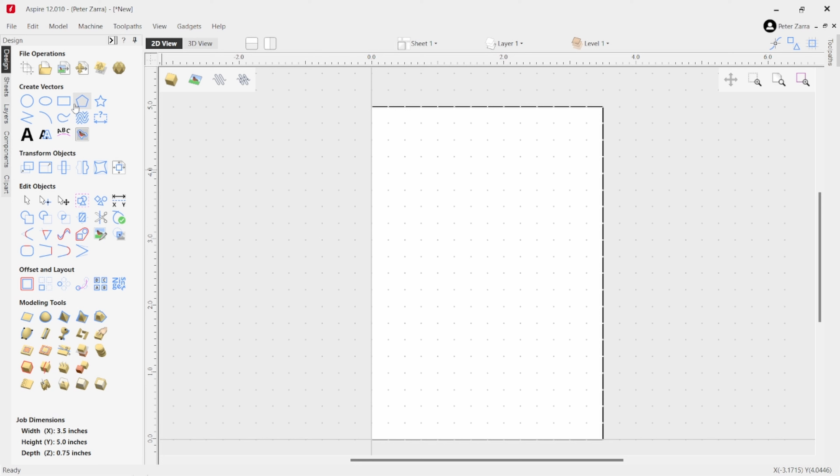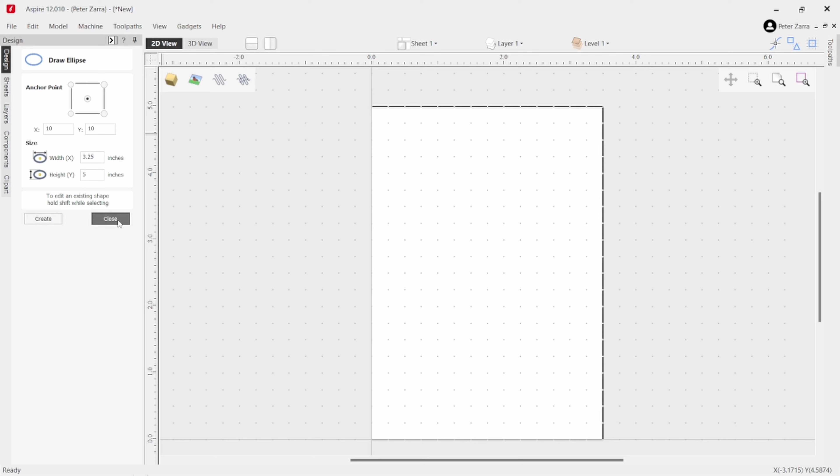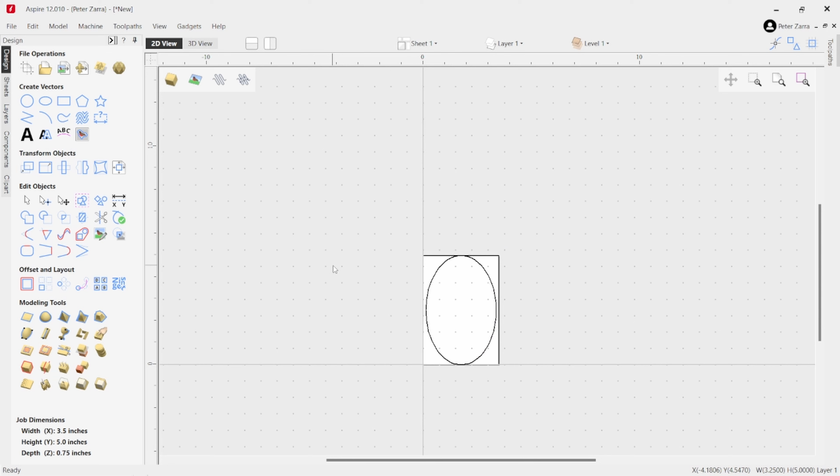Now the next step I'm going to do is I'm going to draw an ellipse. And for the ellipse, I'm going to do the same size that I have on my board, minus a little bit just to keep it to the inside. So instead of 3.5 inches wide, I went 3.25, and for the height, I did go 5 inches. So I'm going to go ahead and create that, and then close it. And if I zoom back out, I'll find it here. And I will bring it in and place it there. And I'm just going to make sure that it's aligned, and it is. Okay, so that's good.

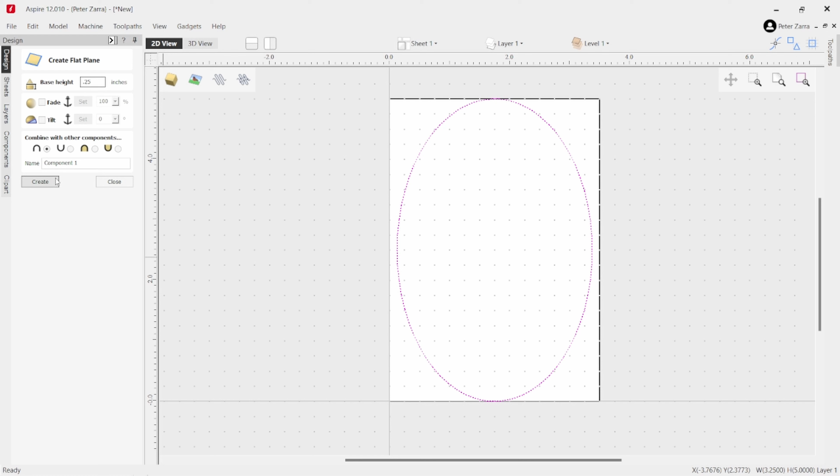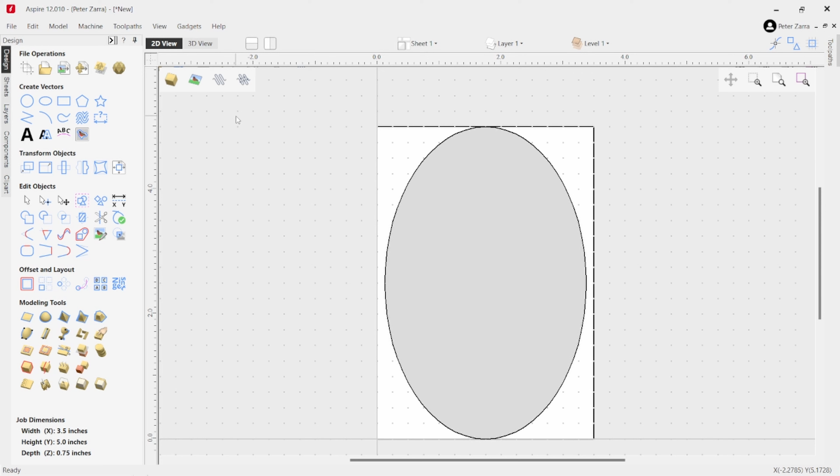So I've got my ellipse there now, and the next step, I'm going to highlight the perimeter of that ellipse, and I'm going to go over here to the modeling tools, and I'm going to create a flat plane component. Basically what I'm doing is I'm creating a background for the ornament, like a plaque, so to speak, which the Santa will sit on and sit proud of. So for this, I want it to be 1/4 of an inch thick. So I'm going to hit create on that. And there we go. Okay, so now if we go to the 3D view, you can see I've got a 1/4 of an inch thick oval background. Okay.

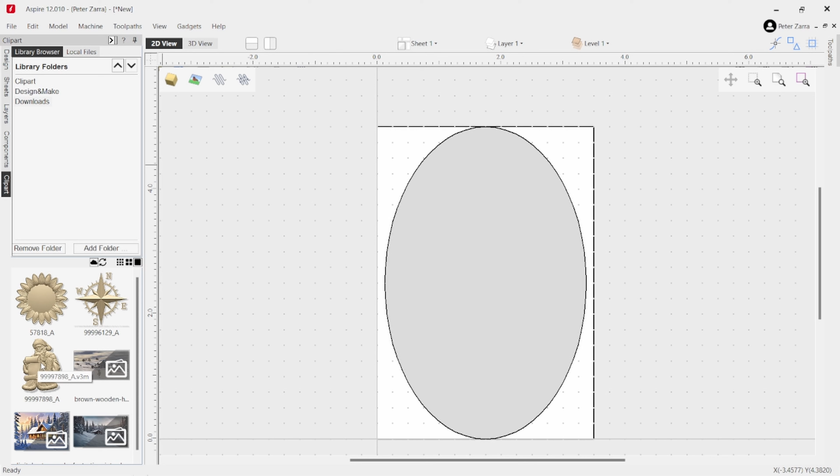So now from there, I will go to my clip art. Now I purchased from Design and Make, which is on the Vectric website. You can buy all types of files from, like here I have a compass, a sunflower. I also bought the Santa and the other Christmas tree tray that I'll show next. So from here, I'm going to take the Santa and I'm going to drag him onto the surface. And he's way too big, so we're going to shrink him down and see when it gets close. Still, it needs a little bit more. And let's see how he's starting to look. Almost.

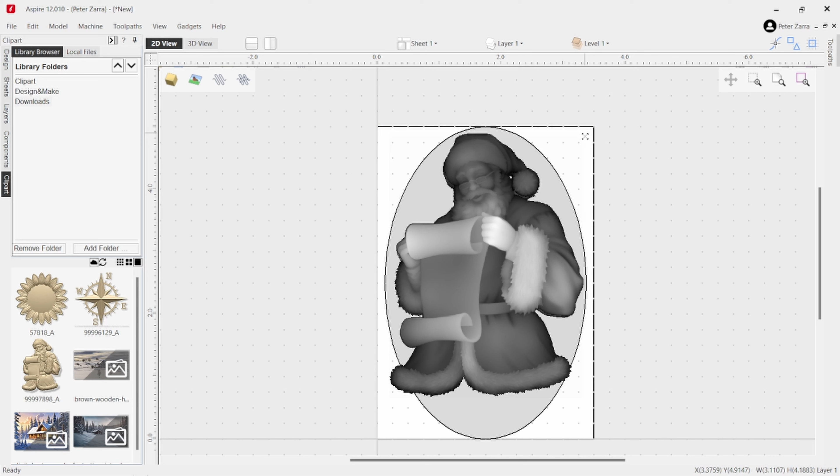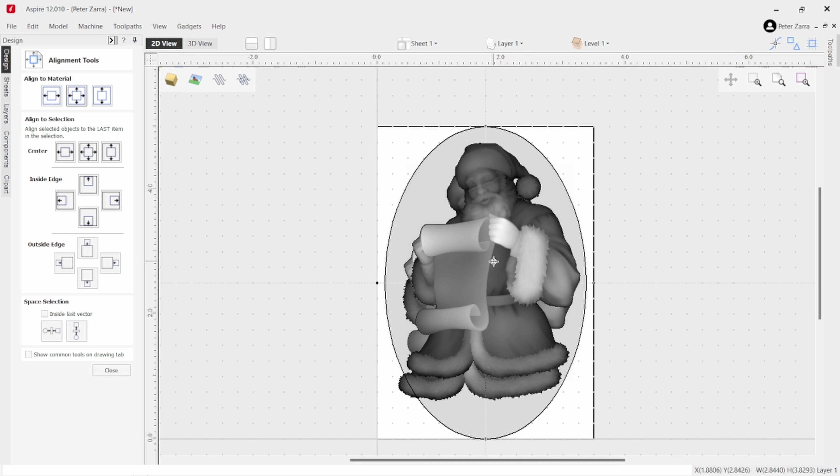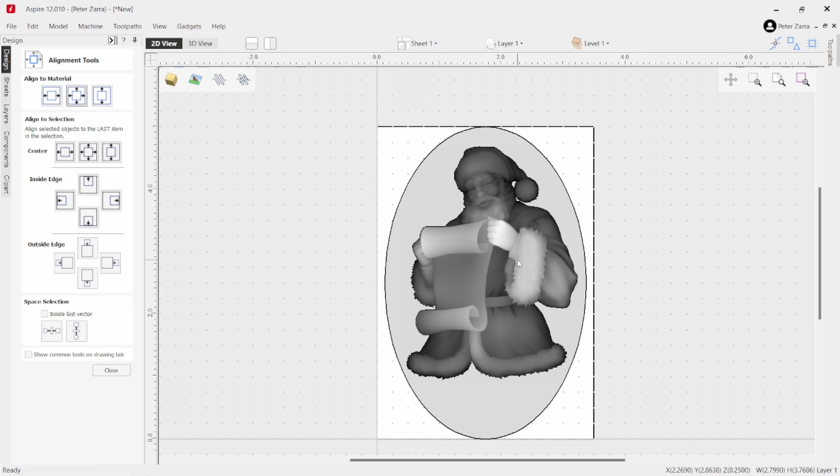I'm going to see if I center him. Nope, it's not going to work yet. That's not bad. Yeah, I don't mind that. Maybe I'll go just a smidge smaller. And yeah, I think I like that. Okay, so now that you have Santa placed on the background, I just want to

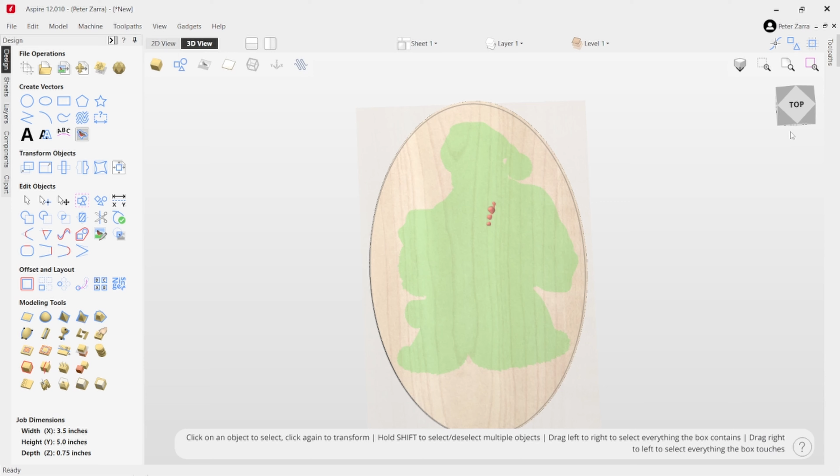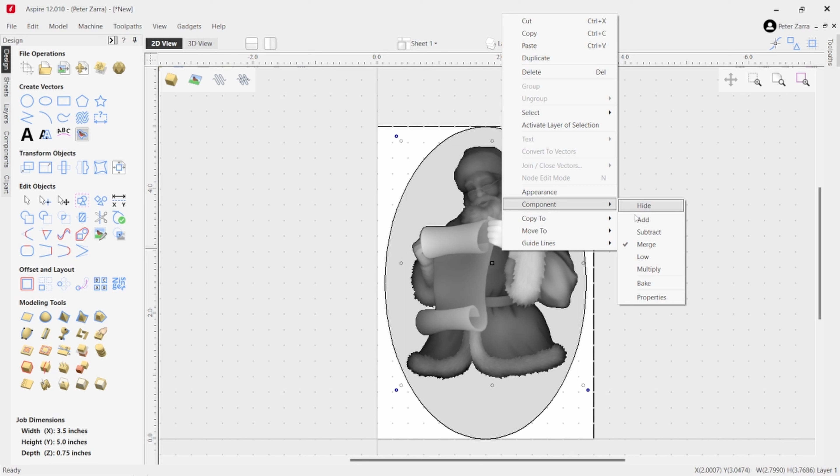double check. Okay, so now that I've added Santa onto the background, if you'll see here in the 3D view, Santa's not sticking up above the surface. So he's basically merged with the background, and that's not going to work. So what we do is go back in, you click on him, highlight him, then you right click on the mouse, and if you go to under component here, you see it's under merge, and that's not good. We want to add him to the surface. So you click on that, and then it comes up.

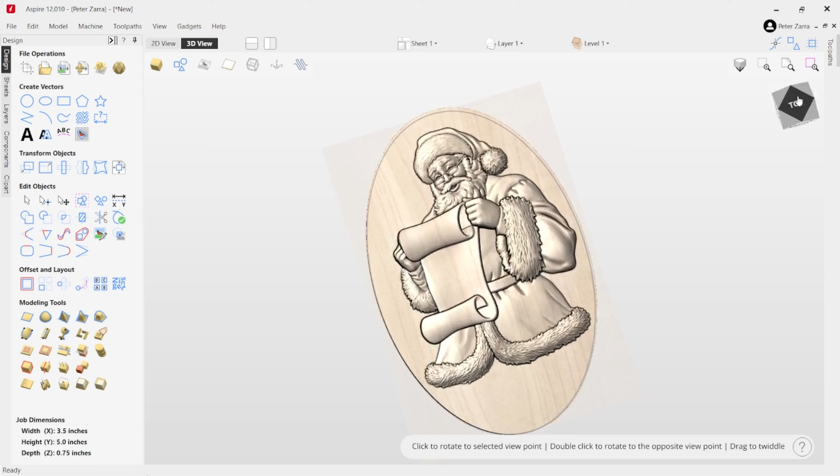Go to the 3D view, okay? And now you can see that Santa is sitting on top of the background and proud of it, and that's what we want. That's the look we want, okay? So for the design aspect, that's it for the ornament. Now we're gonna head over to the toolpaths.

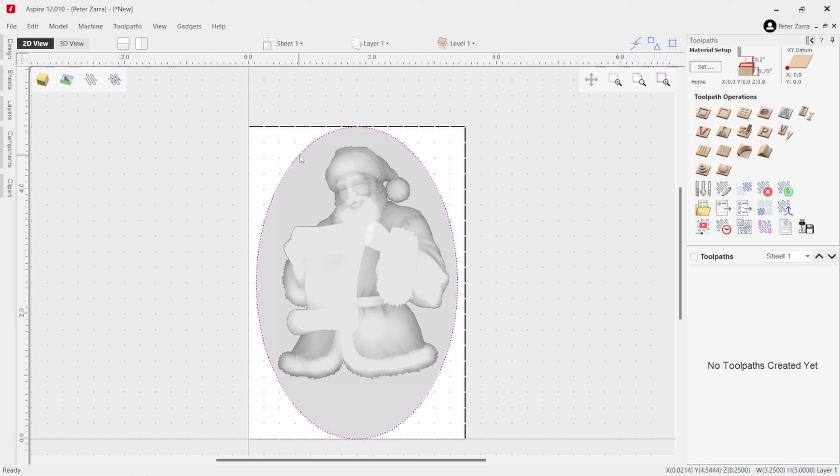Okay, so the first step in the toolpath here is we are going to select this outline of the oval or the ellipse. Once you have that selected, I'm just going to double check the material setup first. It's 3/4 of an inch, which is what my material thickness is. The XY datum will be off of the front left corner. We're going to be going off the material surface. The model positioning is correct.

And everything else looks good. Okay, so now that the material setup is correct, we're going to go to the 3D roughing toolpath. In the 3D roughing toolpath, I'm going to be using a 1/4 inch 2-flute upcut end mill to do the roughing on this particular ornament. And we're going to be using the selected vector, which we've already selected here, the ellipse, oval.

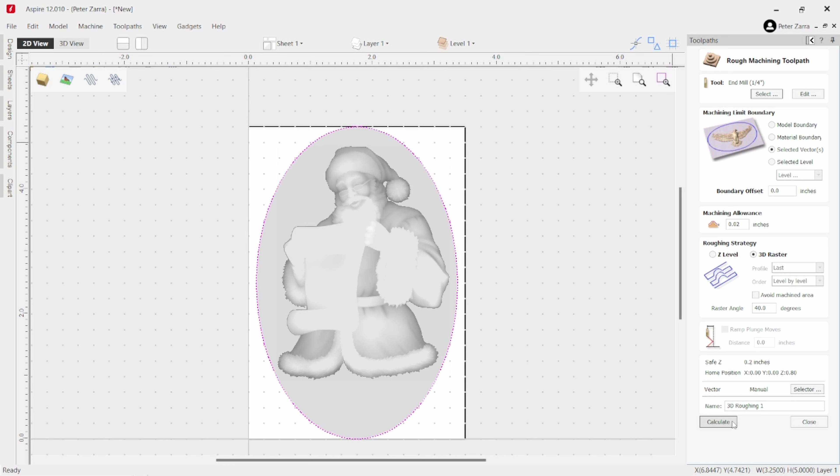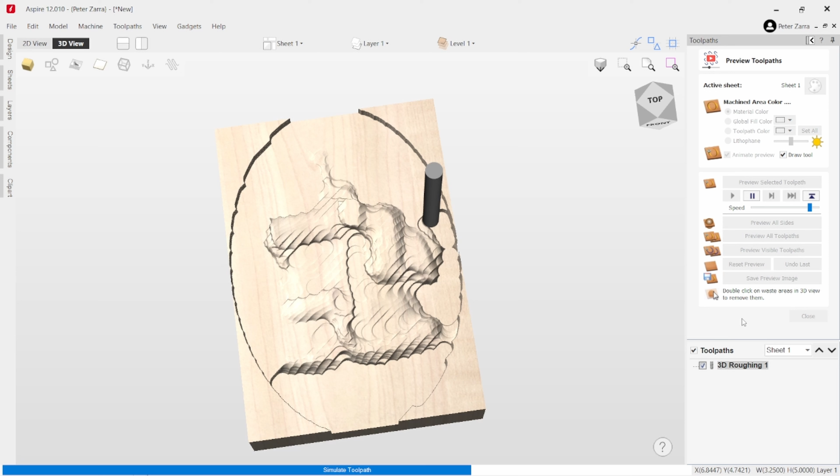There's no boundary offset. We'll have a machining allowance of 0.02. We can clean that up next in the 3D finishing toolpath. We're going to be using the 3D raster on a 40-degree angle. And that's it for this. So we'll hit calculate. Let me reset the preview there. That was from the old one. And I will show you, we'll play it. Okay, so that's what our 3D roughing toolpath is going to look like, and that is fine.

Now that we've got that done, we leave it selected, the ellipse. We go over to 3D finishing toolpath. In the 3D finishing toolpath, we're going to be using a ball nose 1/8 inch end mill. We are going to be using same thing, selected vector. We have a boundary offset of minus 0.02 on this one. And the reason I have the boundary offset at minus 0.02 is so that I leave a little bit going around the edge, which will get cleaned up with the profile pass that we're going to use to cut it out.

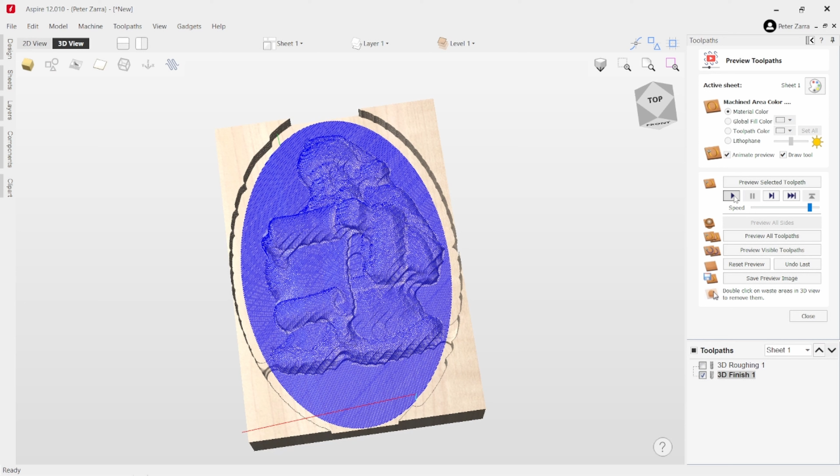And again, same thing, we're going to raster it on a 40-degree angle. And that should be good. So we'll hit calculate. Okay, so now I will just play this one out. Okay, and you can see here, this is the minus 0.02. That's what this gap is that is going around the perimeter of the ornament. And that's fine. That will get cleaned up right now in the profile toolpath. So I'm going to close this out.

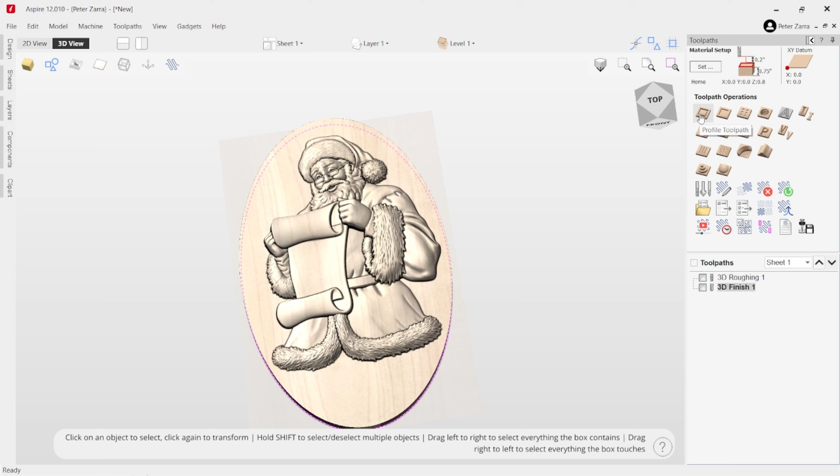So now that we still have the vector selected, we can go up here, profile toolpath, and our start depth will be 0. We're going to a cut depth of 0.753. Remember, my material is 0.75 thick, 3/4 of an inch. So I want to go a little bit past that. I have sacrificial material underneath, so I'm not worried about going through. So that is good. I'll be using a 1/4 inch end mill, a 2-flute end mill, and that'll be an upcut to cut this profile. It's going to do it in 6 passes.

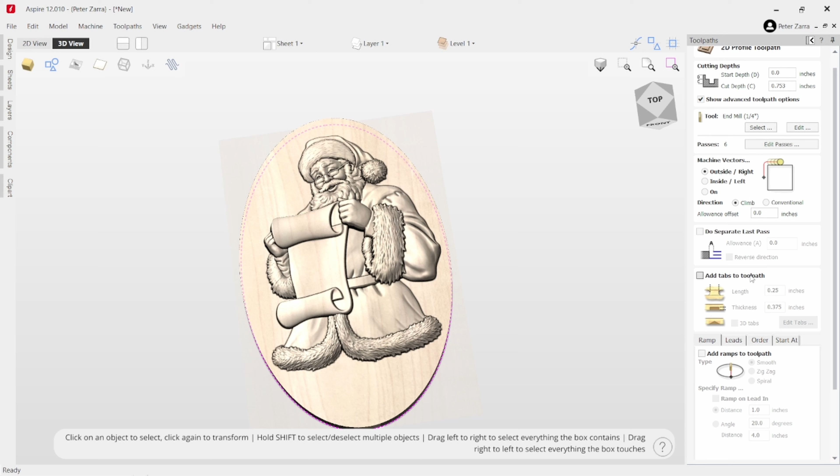And for machining the vector, we are going to machine it from the outside of the vector. So not on the inside, not on it. We're going to be on the outside of the vector. And that will give us just enough room to clean this up. No allowance offset. No separate last pass. No tabs. So that should be good. Calculate it. It's warning me I'm going to go through the material. That's okay. So now I will just hit play.

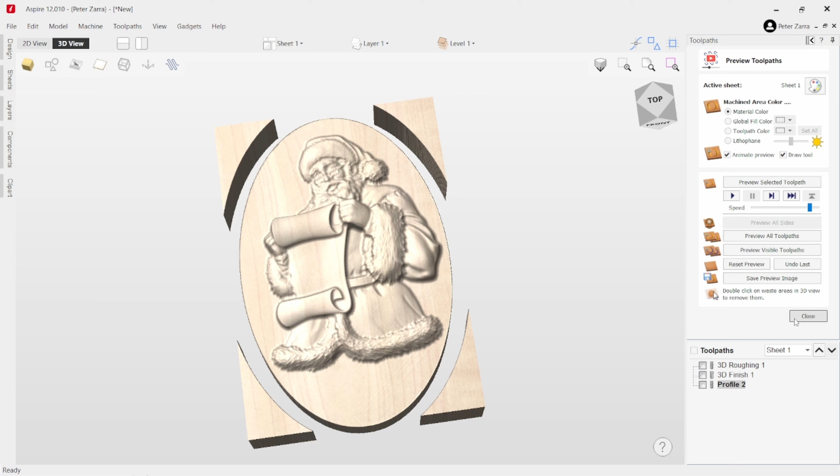And there we go. So as you can see, it cut it right on the line where I had left that 0.02, and it gives me just enough room around the edge there. And that's it. It looks pretty good. Okay, so I'll close that. Now I'm going to click on Toolpaths, and we will click Save Toolpath. And this is where you can save it to your files so that you have access to it when you get to the machine. All right, so that will do it for this ornament.

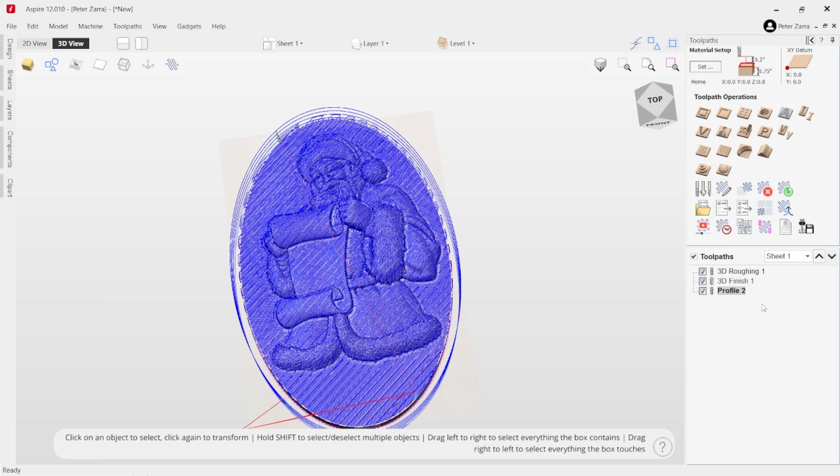Next up, I'm going to show you how I designed the Christmas tree tray. Okay, so for this next one, the Christmas tree candy tray, we're going to go back up, create a new file. And again, this job type, it's going to be single-sided. The job size, the board that I'm going to be using for this tray is 12 inches width by 12 inches in height at a thickness of 1.5 inches.

The 0 position will again be the material surface, and we're going to be using again the front left corner for our datum position. Very high resolution, and it doesn't really matter the material settings. I'm going to make mine out of walnut, so that's what I'll be using here. I'll click OK, and again here we have our board, 12 inches by 12 inches at 1.5 inches thick.

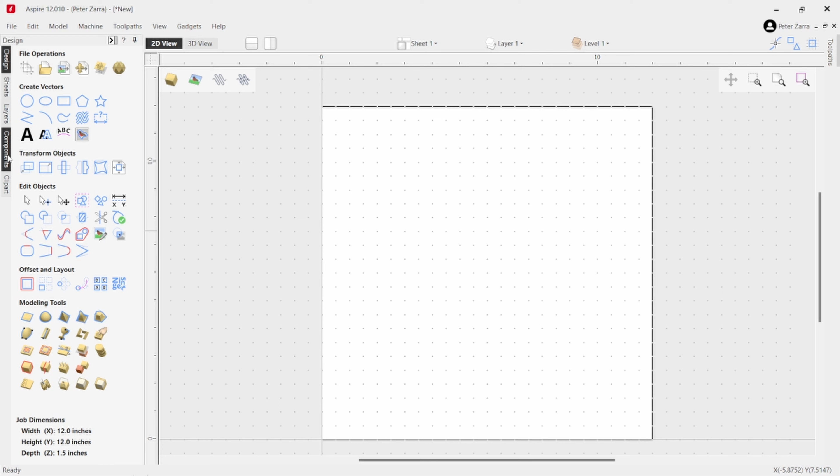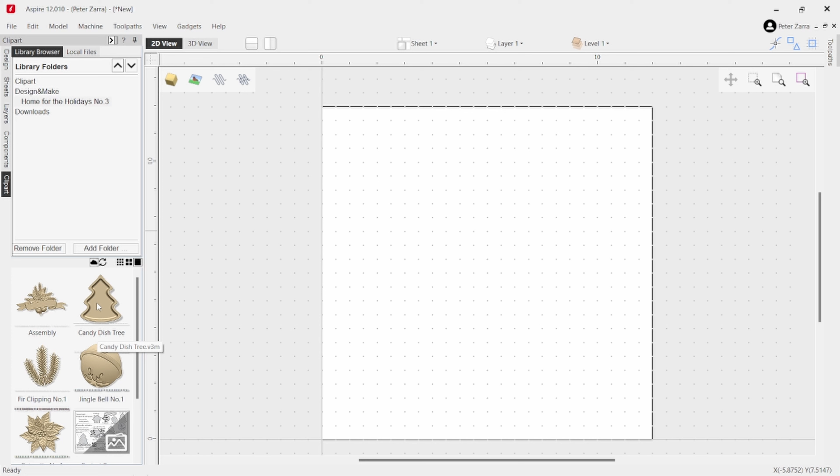And so what I used for this design is I went into the clip art here at Vectric, and I went into their Design and Make store, and I bought the Home for the Holidays collection number 3. That collection comes with 5 pieces, 1, 2, 3, 4, and 5. And part of it is the candy dish tray, the tree tray. And so I'm just going to select this individual component, and I'm going to drag it over to my board.

And now I'm going to upscale it there a bit so that it fits our board. And I go a little more. That's pretty good. I like that.

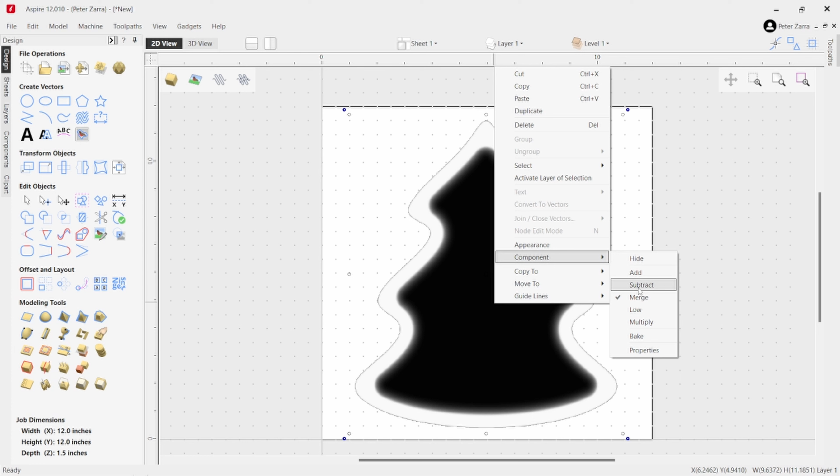Okay, so the next thing we're going to do is I'm going to select the tree itself. And the problem with the tree is that from the store, it comes, and what I'm going to do is now that I've selected it, I'm going to right click on the mouse, and I'm going to go to component, and then in component I'm going to go all the way down to properties and click on the properties of the component.

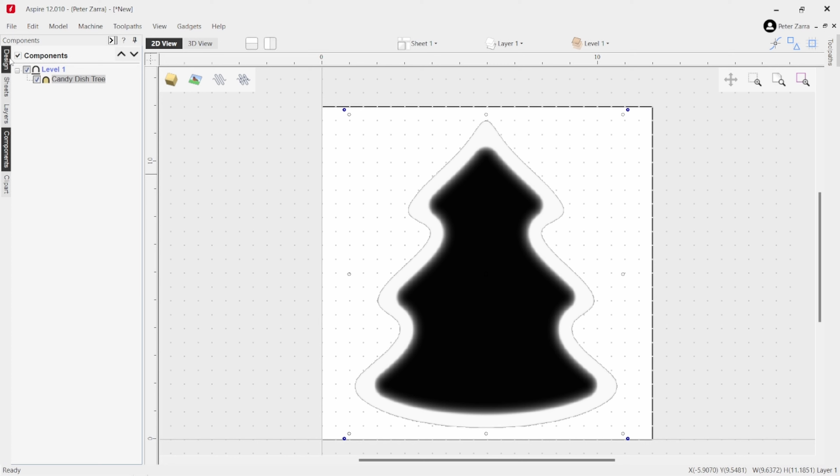And here you're going to see that the component, this tree, has a shape height of 0.6363. And that's not going to work here because my board is 1.5 inches thick. So I'm going to change this shape height to 1.5 inches, and I'm going to close it. Okay, and it should have changed it. So that now if we go into the 3D view, you can see that we have a 1.5 inches thick Christmas tree tray.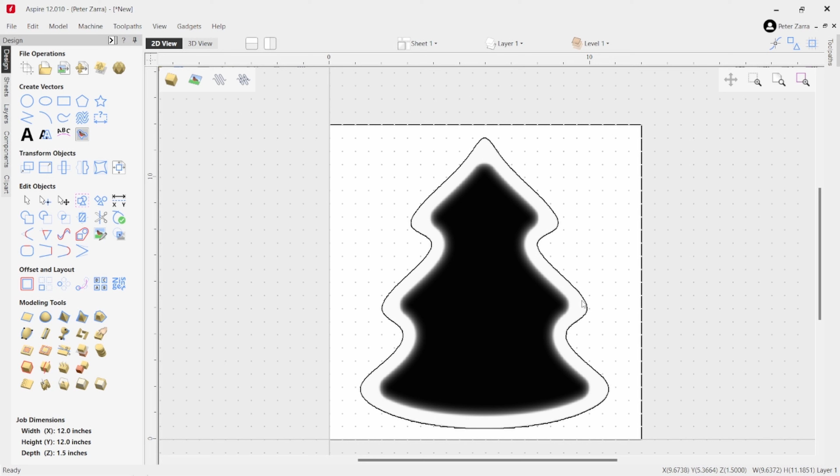Okay, now I'm going to go back to the 2D. I'm going to click on it again to select it. Once I've selected it, I need to make a vector boundary around the entire piece. So we're going to select it, and then I'm going to go over to here and click on create vector boundaries under the modeling tools. See, it automatically created a vector boundary all the way around the tree. We're going to use that for the toolpaths.

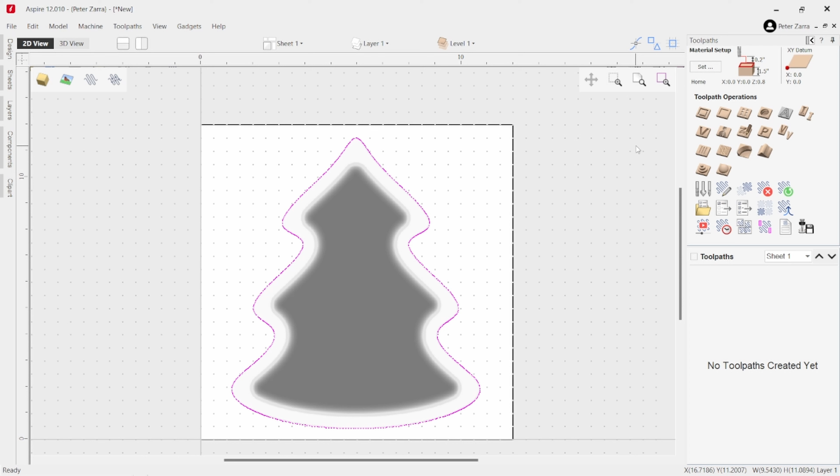So that's it for the design. There's no more to be done here. So we're going to head over to the toolpaths, and in the toolpaths I'm going to select this boundary. And the first step in the process is to set our material first, sorry. And the thickness of our material is 1.5 inches. Again, our XY datum is going to be the front left corner. Z0 is always the material surface. Model position's fine. Everything else is good here. We don't have to change anything, so I'm going to click OK.

Then I'll go back to the pocket toolpath. And for the pocket toolpath, I do it in two passes, in two toolpaths. So I do a rough out one first with a large step over just to get the material out of there quickly. And then I do a cleanup pass, a second pocket toolpath at a much tighter step over so that the bottom of the tray comes out nice and clean, and you don't have a lot of lines from the step over.

So in this first one, the roughing one, our start depth will be at 0, the material surface, and 0.75 is going to be our first cut depth. I want the bottom of the tray to be 1/2 inch thick, so my total cutting for both pocket toolpaths will be 1 inch. The first one will be at 0.75, and the second one I'll show you after is going to be at 0.25. I'm going to be using my radius end mill, which is my bowl and tray bit, the 3/4 inch one. So this is good.

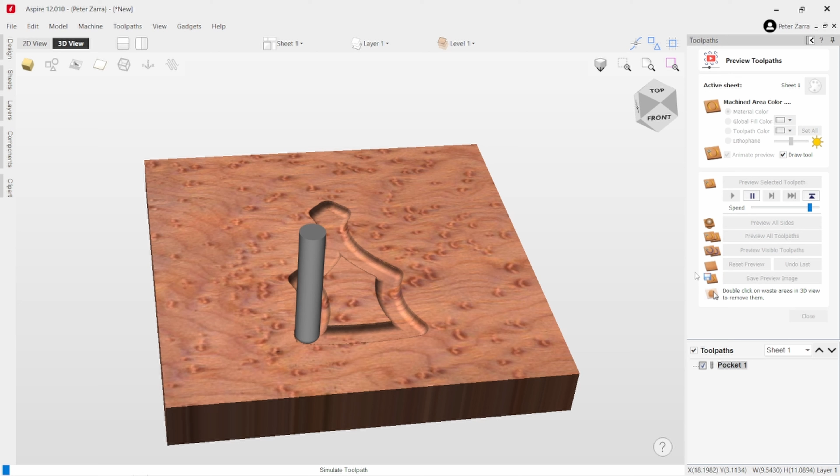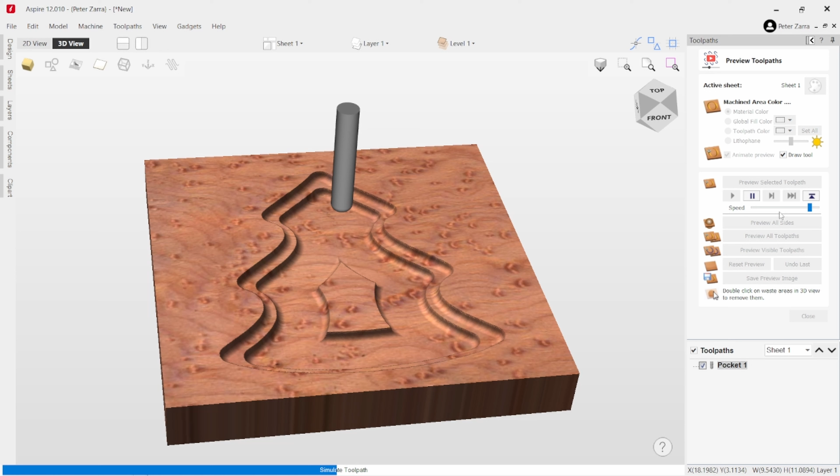I like to do it not really, really fast because I like to watch what it's doing just to make sure that there aren't any errors as it's doing it. If you go too fast, you might miss something, and then you'll find out later when you're on the machine and wonder why. Well, this helps to save a little bit of a problem later on.

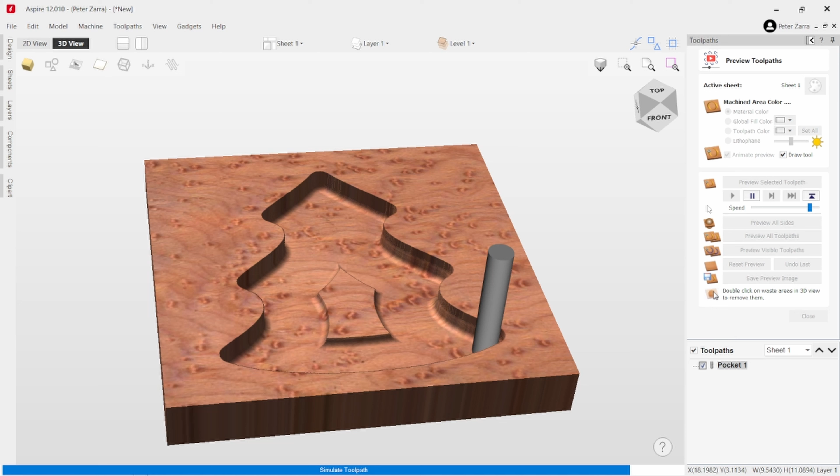Okay, so that is our rough tool path for the inside of the tray. So I'm going to close that out. And now, while we're still selected, I've still got the boundary selected. That's what we're working off of. We're going to go back to the pocket toolpath again. This will be pocket toolpath number 2.

So now our start depth is no longer at 0. Our start depth is going to be at 0.75. And our cut depth is going to be at 0.25. Okay. Again, same bit. Nothing has changed. It will now do this in one pass, offset pattern. However, let me just double check the settings here now for this one.

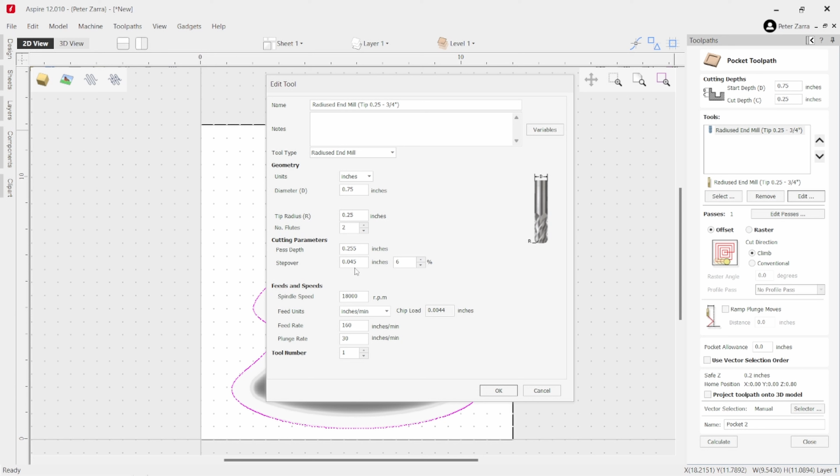Yes, it has the tighter step over, which will yield a nice clean looking bottom, and it won't have the step over lines. So this is fine. I have it at 6% at 0.045, so a little less than a 1/16 of an inch. Again, climb cut.

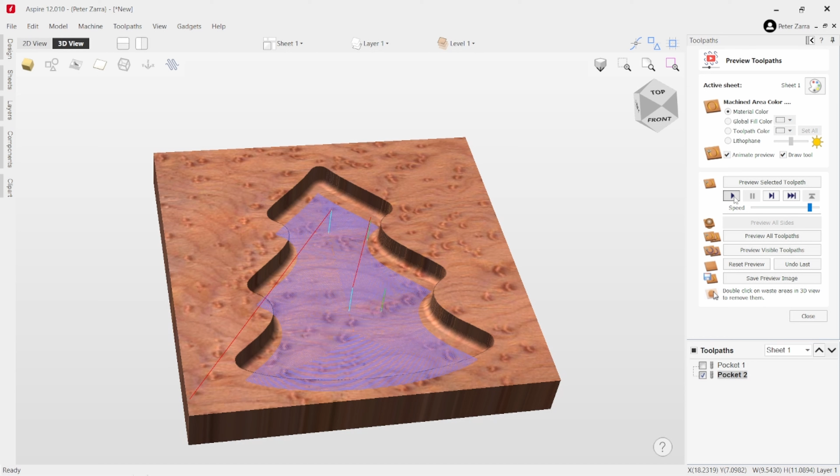And same thing, we have to include the same pocket allowance here. So 0.375. So we maintain our wall going around. And that should be it. I'm going to play this one out. And there you go. Okay, so that is good.

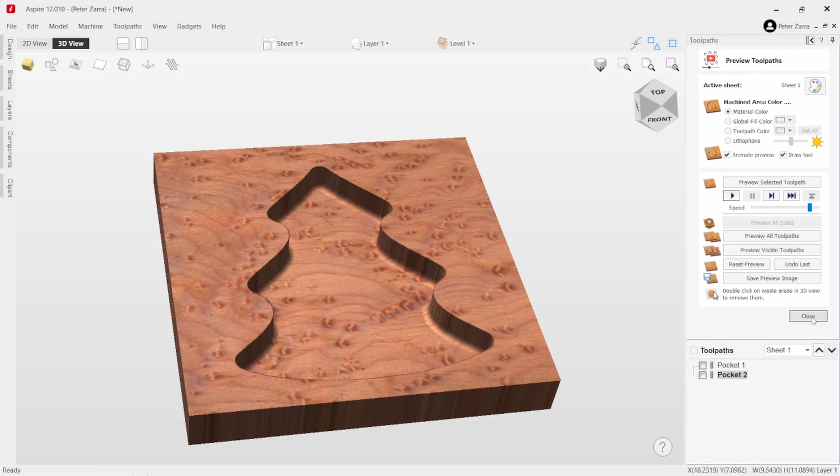And now, again, we're still selected, our vector boundary around the outside. So now we're going to cut the profile of it. So we're going to click the profile toolpath. Our start depth will be at 0. And our cut depth, the material is 1.5 inches thick, but I want to go past that to make sure that I cut it free. So I'll be at 1.53. I have sacrificial material underneath this on the machine, so I'm not concerned about it hitting my table. It's not going to do that, so that's fine.

I'm going to be using a 1/2 inch end mill to cut this, a 2-flute upcut end mill. And the reason I'm using that, it's one of the only bits I have that has 1.5 inches or more of cutting length, so that it will actually cut all the way through and not hit the spindle nut on the surface of the material. It's going to do it in 8 passes, and I am going to be cutting this one from the outside of the vector line, and we'll be doing it in a climb cut.

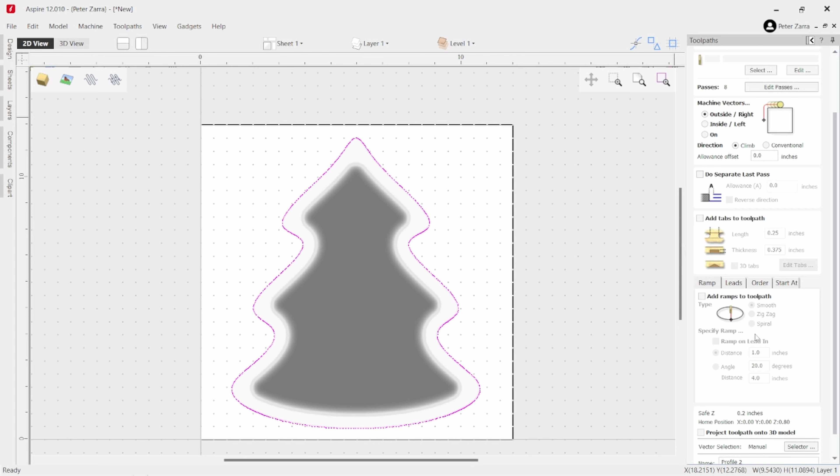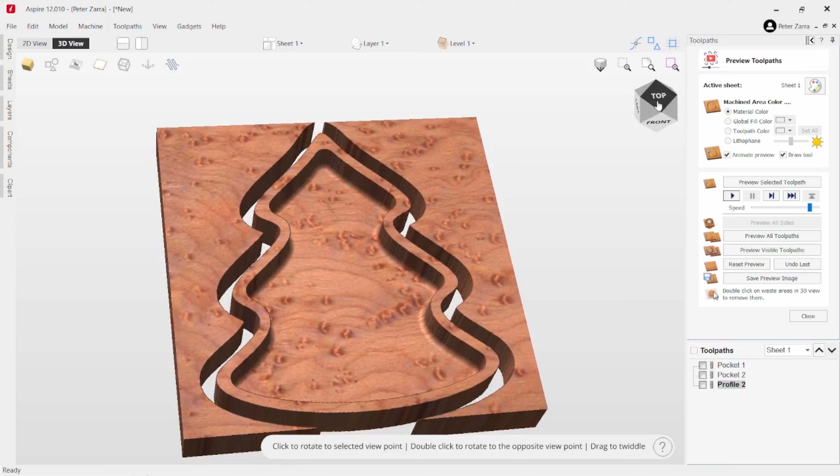Our allowance offset 0, and there's no tabs, so that should all be good. Click profile. It's warning me that I'm going to cut through the material. That's fine. And now I'm going to play it out. And there we go. So we've cut out the tray. Okay. We have a nice 3/8 inch wall going all the way around. So I'm going to close that.

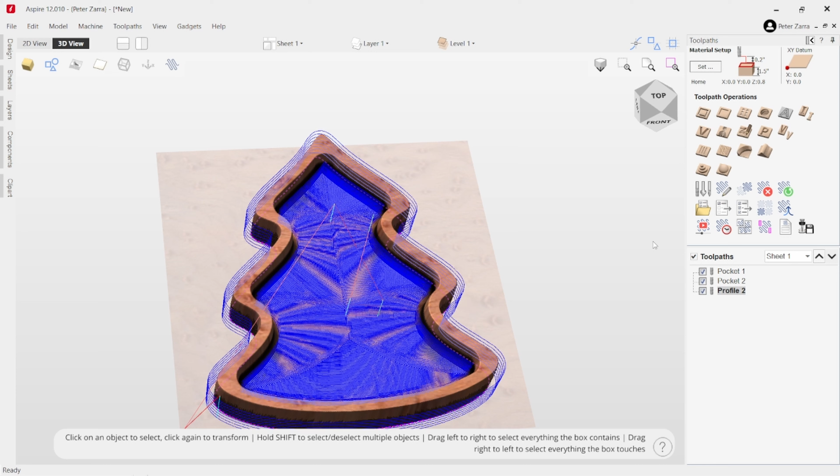So from here, you would just select all the tool paths and then save them to your file so that you have them for later on. I've already done this. So that's that. From here, I'm going to go over to the machine now, and I will machine both this tray and the Santa Claus ornament.

Okay, everyone, so I just wanted to go over a few things before I start machining the Christmas tree tray. For some of you, this might be a refresher if you've watched the How to Make Trays video. But for today, we'll be using the 3/4 inch bowl and tray bit. That's going to carve out everything. And then to cut the profile, we're going to be using a 3/8 inch end mill, 2-flute end mill.

Okay, so I'm also using double-sided mounting tape to hold my board onto my sacrificial board. And I have tape for the center of the tree to capture the tray, and then tape on the outer perimeter to hold the scrap once I profile it to keep that from hitting the bit. All right, so now that you've seen the setup, I'm going to mount the board and begin to machine it.

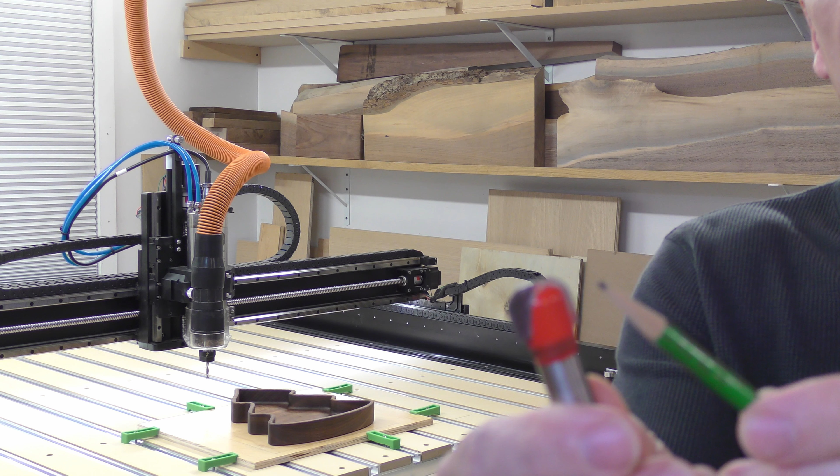Well, I'm using a bowl and tray bit with, and I'm going to come in close here, a 1/4 inch radius edge on it, okay? And what I found out, and here's the big tip, is that on your second pocket tool path, your depth of cut cannot be less than the radius of your bit. This particular bit is a 1/4 inch radius. I was cutting my second pocket tool path at a 1/16 of an inch depth of cut.

So what was happening is the software, to account for the 1/4 inch radius and making sure that it would line up with the first pocket tool path, was pushing the bit over more to get the point where the bit would contact the first pocket tool path. So it had to go over more in order to do that. And I didn't know that you cannot, on a second pocket tool path, be less than the radius of your bit. So what I ended up doing, and I showed you in the design the correct way, is that the second pocket tool path, I made it a 1/4 inch depth of cut. And once I did that, the machine no longer kicked over to the side and was crashing into the wall. So that's tip number one.

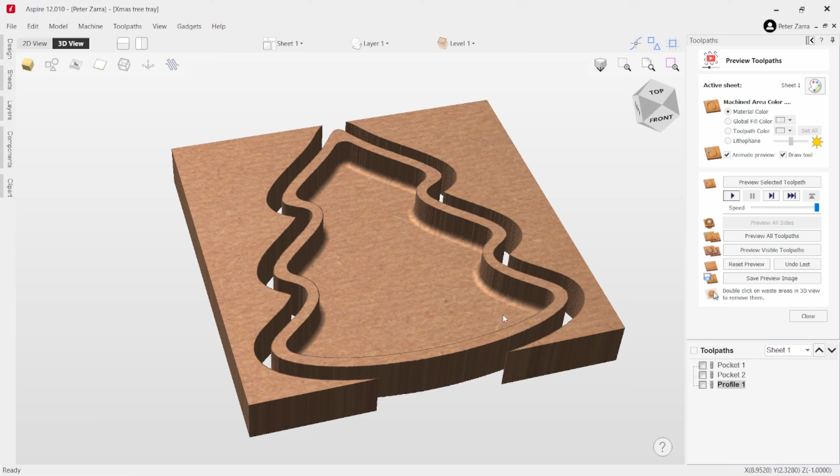And so I came back into the software and I was wondering, hey, maybe this file, that's what it has in it. And sure enough, when I zoomed in on it, you can clearly see that the perimeter wall, both the inside and the outside walls, have this jagged edge in it. So the machine is carving this because it's a detail of the piece.

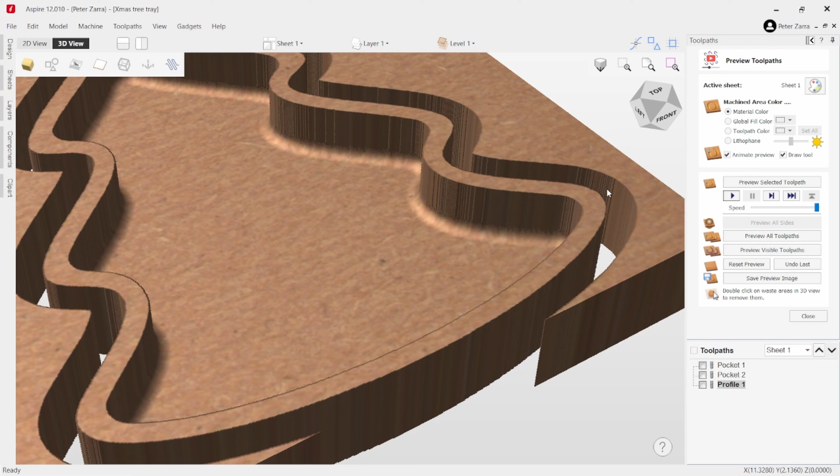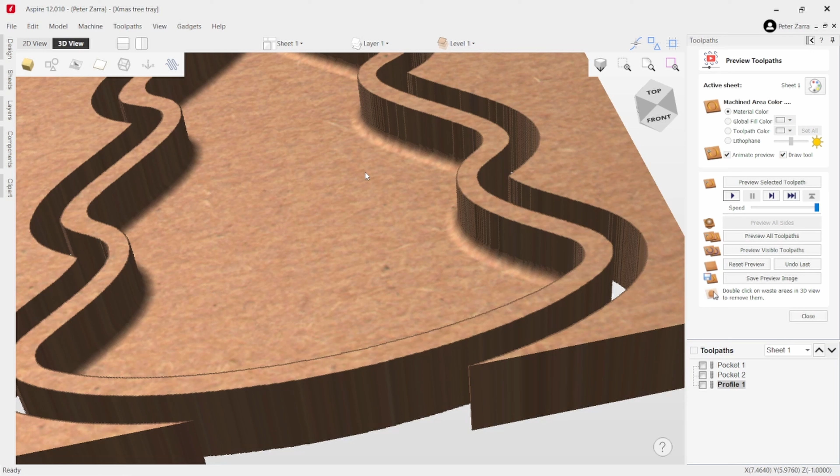So what I found out is that this file is not clean. And I didn't know that when I bought it. It came already as a candy dish tray, where I was really just looking for something that was just a shape, an outline of the Christmas tree. And then I, from there, would go and create my own pocket toolpath and stuff to make it into a tray. I didn't want something like this, but that's what it was there, and so I went with it.

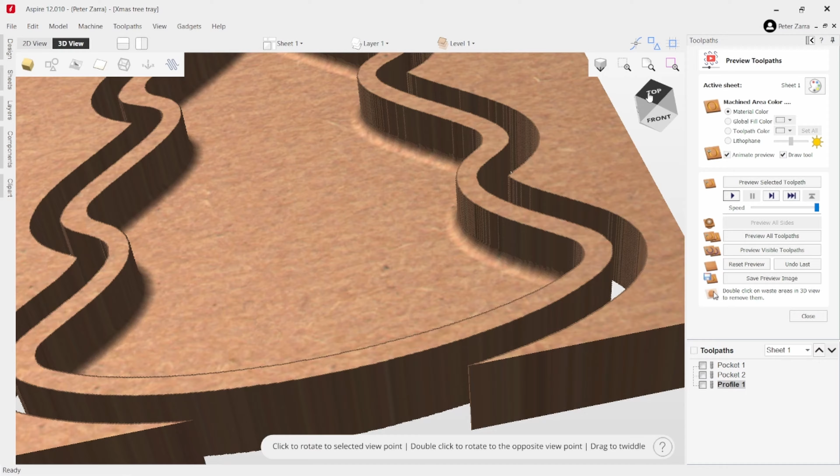But now in hindsight, I learned that, for example, this file is no good. It cost me a lot of handwork after the tray was done, me having to sand all of this on the interior and the exterior to get it smooth. Again, because it wasn't right. So that's just something to note if you purchase one of these files also, is to look at it in the preview toolpaths. It's a great feature in Vectric, and it really shows you everything. If it's there, the machine is going to machine it that way.

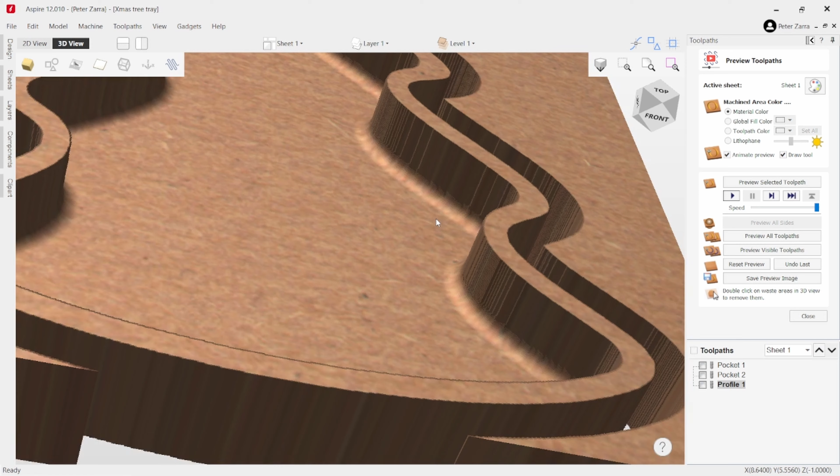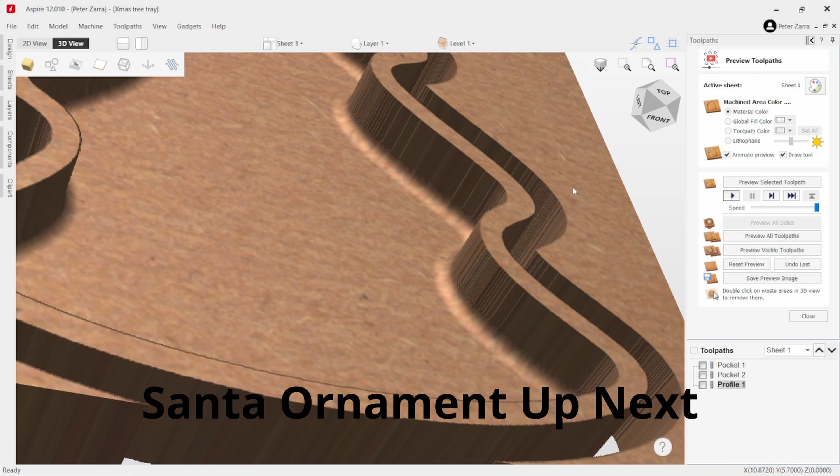And boy, I learned a lesson. I didn't know that. And well, it saved me from having to do a lot of testing on the machine to make sure that there was nothing wrong with the machine. And in fact, there isn't. So yeah, I'll be very careful when I buy files from now on as to how good they are. And so that's just a little tip to consider.

All right, so I'm now set up to do the Santa ornament. Got the block, same setup as the Christmas tree. We're using double-sided tape to hold it down. And for this one, we're going to be using a 2-flute end mill to do the roughing out of both the Santa ornament, the inner part, the design, and to cut out the profile.

And then to do the finish 3D work, we're going to be using a 1/8 inch round nose bit. This one has a 1 degree taper, I think it is, but it doesn't matter. It's only going to be cutting on the tip. So yeah, that's that. Let me get it set up and we'll start roughing it out.

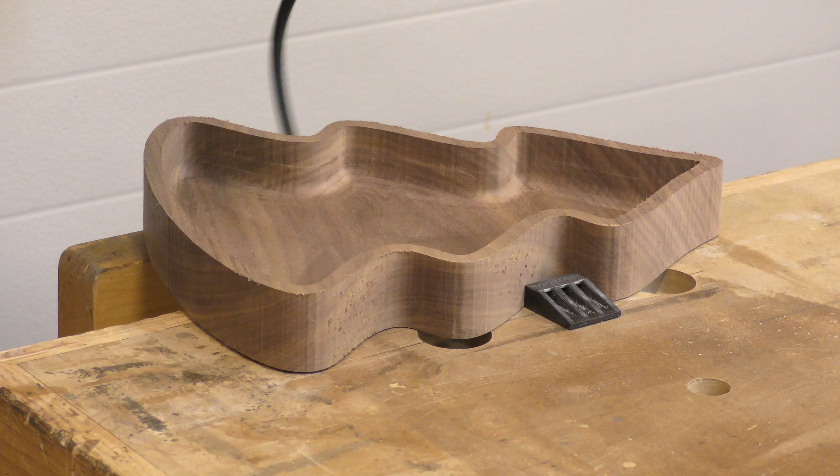Okay, so I know in the last video on the trays, I had used my shaper to do the round over on all the edges of the trays. And I just wanted to show you guys that you don't need big fancy tools. I have them. I'm just gonna use a mini router here with an 1/8 of an inch round over bit and just do it by hand. Just to show you that you can do it very easily with simple small tools. You don't need the really big stuff like I have. So let me go ahead and show you how I do that.

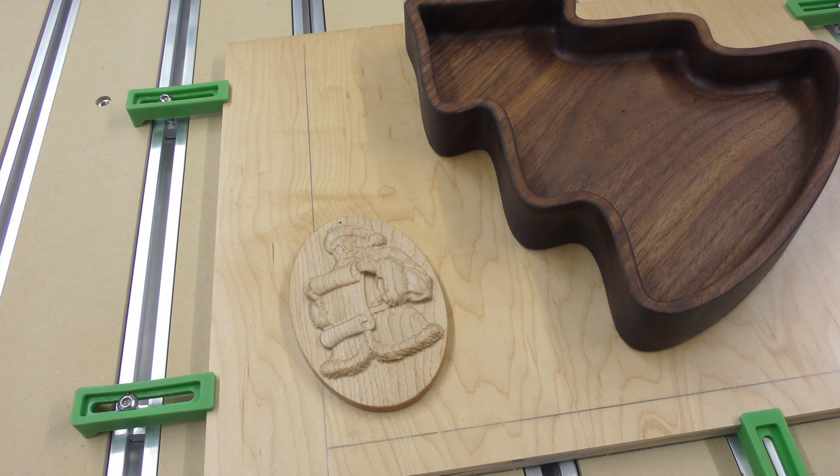Okay, so here are the two gifts. I've oiled them up and just wanted to give you an up-close look at them. That's the Santa ornament. Pretty cool looking. And that is the walnut Christmas tree tray, after I saved it. This tray taught me a lot. But in the end, it did come out pretty cool. And again, two easy, quick gifts that you can make for anyone and enjoy the holiday season.

Okay, so that's gonna wrap it up for this one. I hope you learned a lot from it. I know I certainly did. I have been chasing that issue with the trays for a little over a month or two now and couldn't figure out why it was doing that. And I'm really relieved that I figured out that one little problem in the settings there.